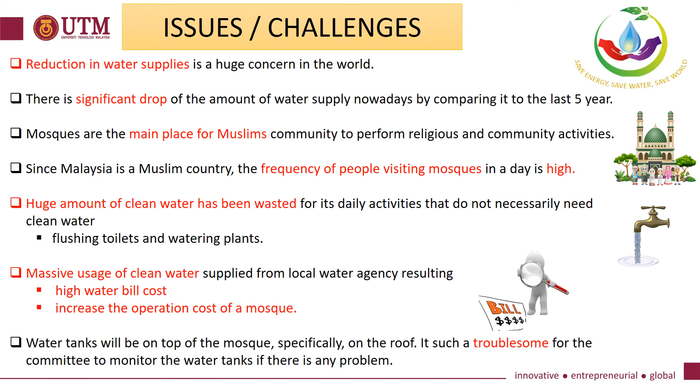So what actually is the problem that we want to solve? We want to reduce the water usage from the local water agency, such as Syabas, as well as the high water bill faced by the mosque.

If we can save the water, then we can save the energy. We can reduce the bill for the mosque. Second, to monitor and control the water flow by using an IoT platform. So we came up with this solution to give awareness to the community to please use water efficiently.

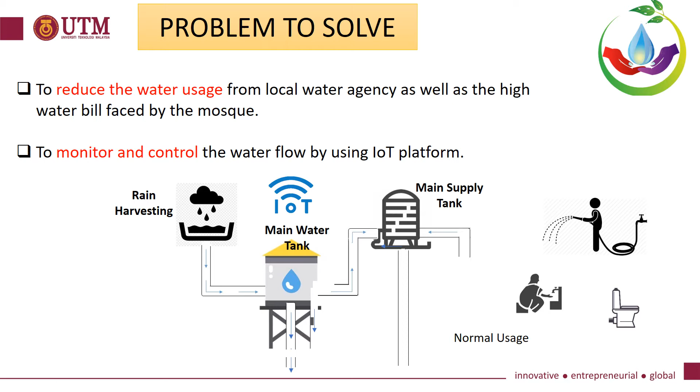So we have our main supply tank. Currently in Selangor we have Syabas, and then we propose rain harvesting, linked together with IoT. So at least we know the clean water is used for wudu, but for flushing toilets and watering plants it is enough to use rain as a source. This is our solution and our novelty.

On the left side, the figure shows our prototype. We have our main water tank - let's consider the white one as our main water tank. We receive the water from Syabas. The Syabas water tank is on the right top.

We have another tank on the left side for the water catchment area, the source from the rain - this is the rainwater tank. This means we will use the rainwater first, and then we have a UV filter to filter unnecessary things in the rainwater tank. At least we can use this rainwater tank for our daily usage in the mosque.

If the tank is empty, then we will use the Syabas water tank. On the right hand side, we have a block diagram of our smart water flow system. We have our controller, our relay as actuator, valve as input, a power supply, water flow sensor, ultrasonic sensor, and Wi-Fi. Wi-Fi is our important component here, since we connect everything for water level conditions through the Internet of Things.

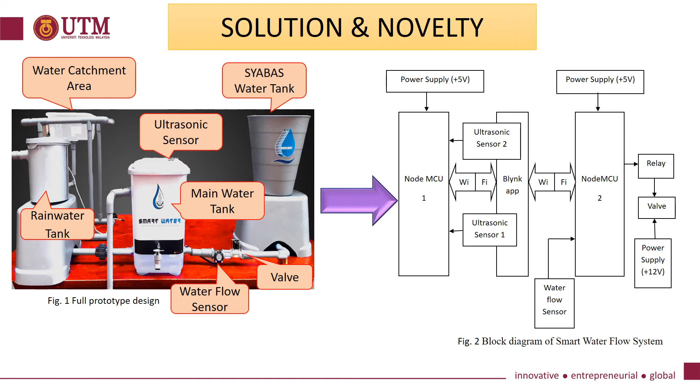So this is an example - we collected results based on our pilot study in one of the masjids in Kuala Lumpur, Setiawangsa, called Masjid Muttaqin. So we have this result for the percentage of water level in the main water tank.

This indicates the level of the water, so the committee can easily determine the condition of the tank. We know the amount of water flow, not only the level - we can also monitor the flow. Then the percentage of water level in the rainwater tank - we have two water tanks, the main water tank and the rainwater tank. We cannot monitor the Syabas directly, but it is our source.

Basically, most masjids store the Syabas water in the main water tank, and we have extra rainwater from the rain. Then we can monitor both, and we have our valve manual control button. This valve controls on and off for these two tanks.

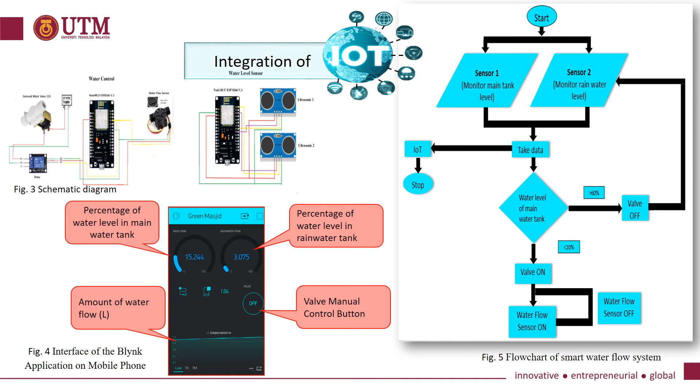So this is the flow chart. We have sensor 1 for the main tank and sensor 2 for the rainwater tank to detect the level. We take the data, compare it, and determine whether the valve is on or off, or water flow is on or off. Everything is controlled through the apps.

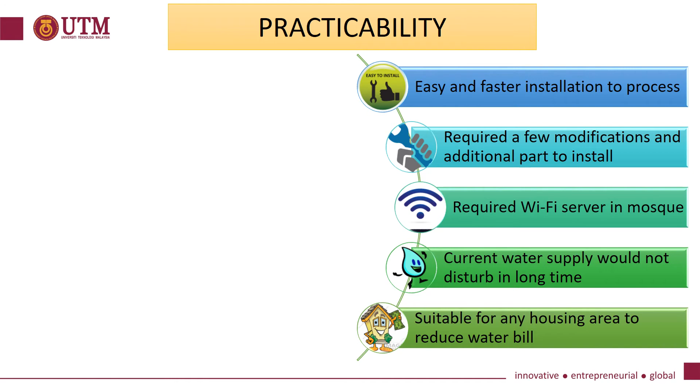In terms of practicability: yes, easy and faster installation to process. It requires a few modifications and additional parts to install. The most important requirement here is a Wi-Fi server in the mosque, and the current water supply will not be disturbed long term. So it's very suitable for any housing area to reduce water bills.

So this is our apps monitoring system, showing real data measurement. This means the masjid committee can easily know the current scenario or condition of their water level in the tank. This is the result showing the percentage of water level in the rainwater tank increasing.

You can see if it's zero, what happened - this indicates that our rainwater tank is now zero, so we will use Syabas water, because this depends on the rainy season. If there has been a lot of rain, they will have a lot of extra water in the rainwater tank, and this valve is manually closed. The valve is manually opened so we can check the water tank from the Syabas supply.

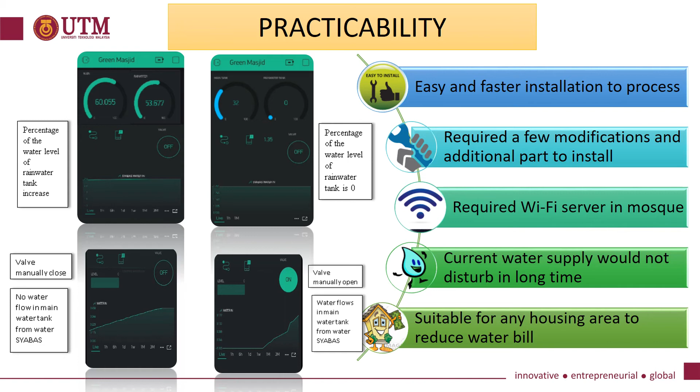This is our pilot study at Masjid Muttaqin Wangsa Melawati. We have installed our sensor there, and for product comparison, so far the only available product in the market is the smart meter TNB. But compared to our product, we have more advantages due to the apps - it can be remotely turned on and off, and also uses rainwater as an alternative.

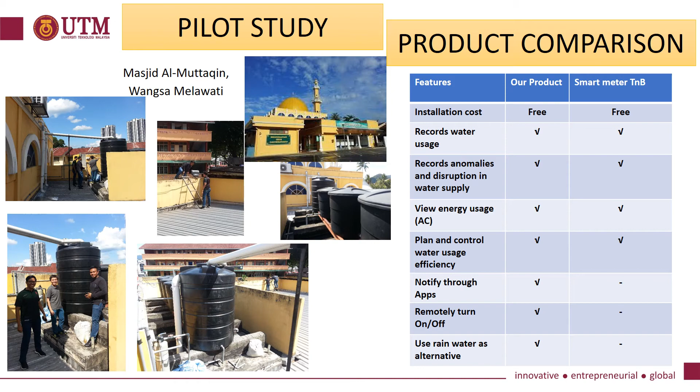What is the impact? There are four impacts here: economic, environmental, safety, and commercial value. We can reduce water bills, free to download our apps. We can utilize rainwater as the main water source instead of Syabas, increasing awareness on water consumption. We monitor the water flow via the Blynk app, reduce occupational safety hazards, and this is a low cost solution that promotes conservation.

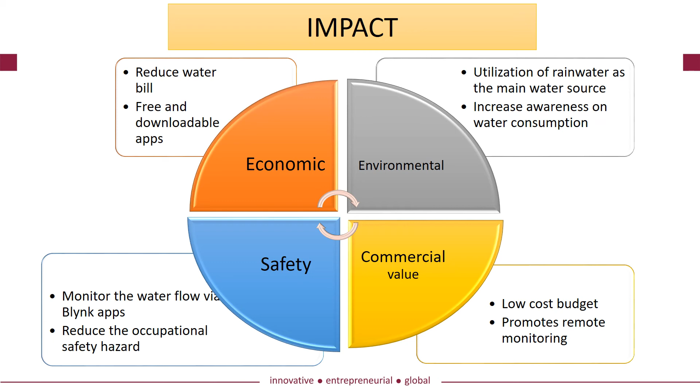Before I end my presentation, let's take a look at our project development.